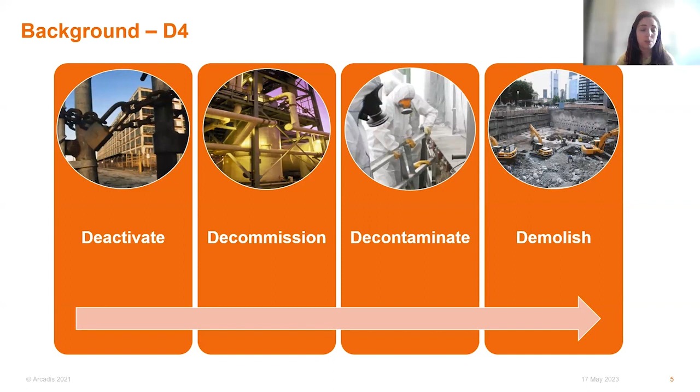And as I touched on, with the linear approach, the life of a built asset at the moment is very much extract, make, construct it, operate it until a point when it's no longer required, and then demolish it and dispose of the material at the end.

So I guess, is demolition better than remediation? Retention? It's a bit of an ethical dilemma. I think there's a couple of good examples here. Launceston Primary School is being demolished because of construction issues.

But we often find that actually, in some cases, and probably more often than not, buildings are being demolished for maybe more superficial requirements. For example, a Lidl site in Dorset has been given permission to demolish its old store because it's described as dated and can't meet the needs of the customers and their shopping environment.

So I think when you break that down, it's trying to understand what that actually means, and is it really a genuine requirement? Lidl say they're looking to install a more sustainable building, with reduced energy and water consumption, solar panels, and electric car charging points, which are all really great things and should be introduced into new buildings.

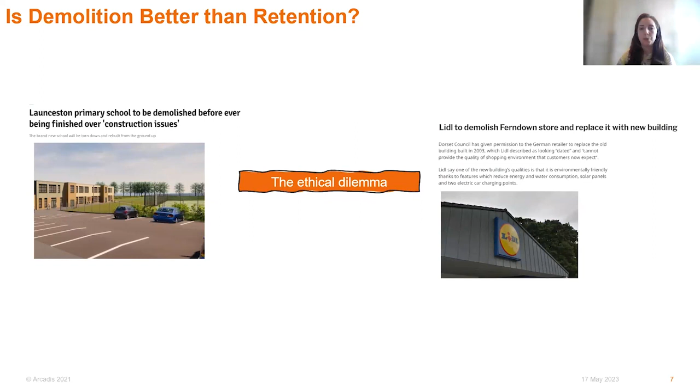A couple of articles demonstrate this is going to become a bigger issue in the future. More and more architects and local authorities are thinking about this and being urged not to knock things down. I think now's the time to change and start looking at ways we can meet our needs of the future without compromising future generations.

Another good example you may be aware of from the media is Oxford Street in London—the old M&S building—which is currently going through lots of levels of public inquiry. They want to demolish it to create a brand new store, again sustainable, efficient, and better quality.

But there it's obviously being contested. People don't want the new structure, and they don't want the demolition of the old building because it's quite a nice building. But the reason being used is essentially the sustainable impact, the impact on the environment.

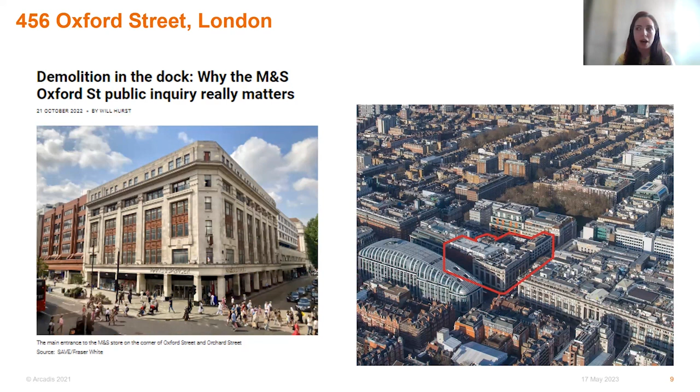London and a lot of cities have got net zero targets they are probably not going to meet, and demolition of buildings like this is only going to make that worse. So I think at the moment in the demolition sector, we very much look at the least bad option.

Currently, sustainability in the demolition sector is very much about high recycling rates and alternative fuel sources. If you look at any contractor's tender submission bid and ask them about sustainability, they'll all have the same generic answers: we have 95% plus recycling rates, all our plant is electric, we use HVO fuels. I can bet pretty much every single contractor has the same response.

And that again has a big impact on the outcome of the project. The London 2012 Olympic Park site, a 2.5 square kilometre site in East London, needed demolition of a number of buildings to make way for new development. They implemented a sustainable development strategy which set target recycling rates of 90%, which sounds great—however, that was a combined target of 90% reuse and recycling.

When the project was completed and the demolition contractors presented their actual metrics of what was recycled and what was reused, it was found that actually the rate was 90% recycling and more like 0% reuse. That's part of the problem—at the moment there's no split-out approach to looking at them separately.

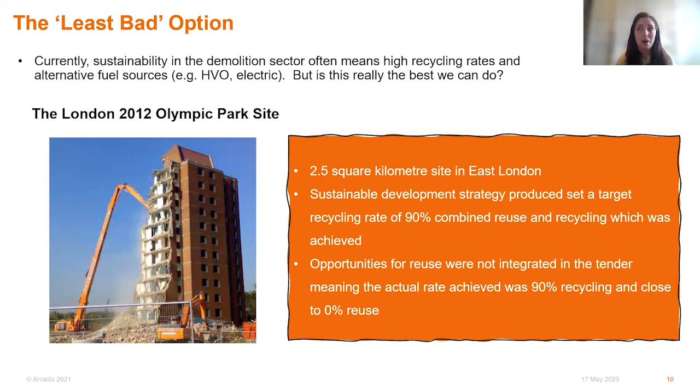So why the change? I think these are some quite stark reminders of the impact the construction and demolition industry has. When you look at these, you can understand a bit more about the perspective of where we're coming from.

The construction and demolition sectors in 2016 were responsible for 62% of the total waste generated, which is absolutely huge. And the built environment uses almost half of the world's materials extracted each year.

I think the problem we're having is a lack of good quality, accurate information. People don't understand what their buildings are constructed of, and what they can do with the materials after. There's a lack of engagement and collaboration between all the parties.

Demolition contractors and us as a team are generally brought in towards the end, and again when it's quite a reactive response needed. So there really isn't much time for coordinated planning, and to provide good evaluations and good assessments of what actually we can do with those materials.

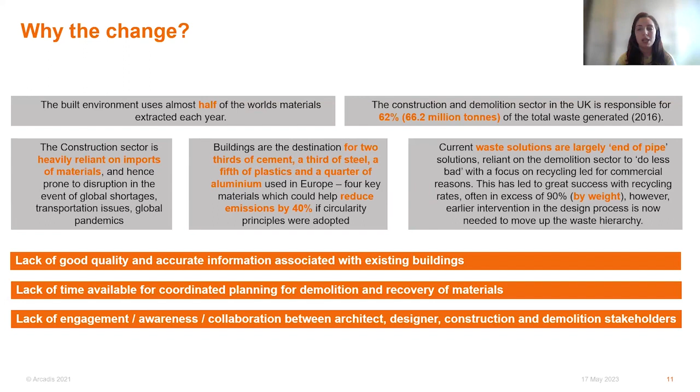Today, a lot of the focus on the built environment has been improving the efficiency of new buildings. As I mentioned, a lot of clients are looking for sustainable buildings, sustainable offices, and the decarbonisation pathways have been very much reliant on the use of alternative fuels and carbon offsetting, which personally I think

is just putting a band-aid over the problem. Obviously we should be doing what we can, but I don't think it's enough.

I think there isn't enough reliance on alternative pathways, so considering embodied carbon emissions, which is often 20 to 40% of the whole life carbon emissions of a new building.

So I think we need to be looking at the whole process. New buildings, sustainability of new buildings, is really, really important, but how are those made and what are the materials we're using to make them? Where are they coming from? Are we just constantly extracting new raw materials for that?

So the graph on the right hand side essentially comes from research from the Centre for Industrial Energy, and essentially they report that improving material use could potentially reduce emissions by nearly 80 megatons of carbon dioxide by 2032.

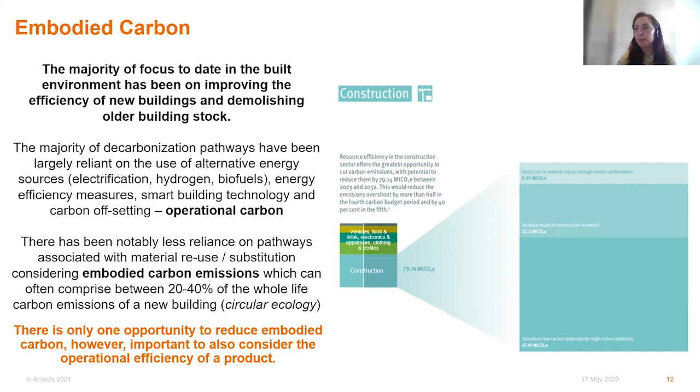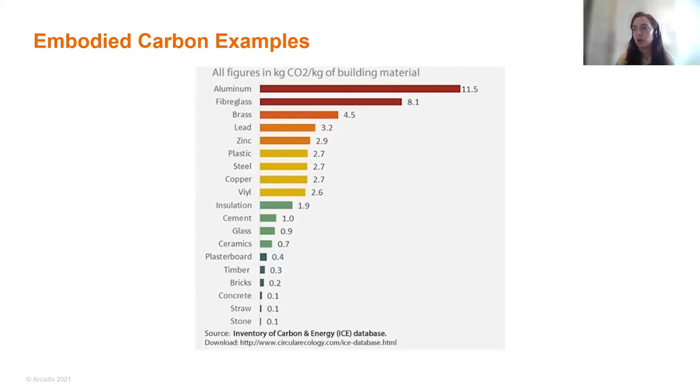Just a very quick slide showing some examples of CO2 in building materials. Essentially we look at these values and take them to do assessments when we're looking at demolition of buildings, which I'll touch on in a little while.

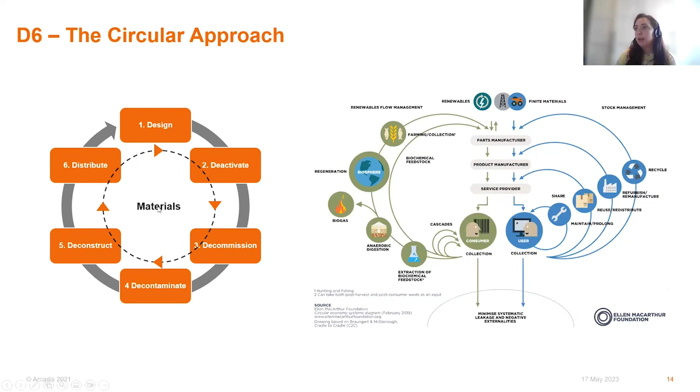So how we go about doing that - just to give a bit more information on each of those Ds and what they now mean. Obviously D1 is design, and that's where we come in at the earlier stages of the project. We're engaging with clients, designers and planners to essentially see how we can support adopting those circular

design principles in new buildings, but also at the end of life of a project, we want to engage with clients a lot earlier to help them make good assessments of what their building could be used for or where the material could go, so that they actually have a solution backed up by science, rather than just saying, oh, well, we'll just send it off for recycling and that's great.

So deactivation of facilities. Previously that was sort of removal of plant and equipment, and it still is, but rather than just sending it off for recycling as it often would do, it's looking at alternative ways those materials could be repurposed. So potentially could they go off for auction, or could they be used on another site elsewhere? Charities we find often take equipment depending on what the site is.

And then that's deactivation, decommissioning, decontamination. So obviously continued removing of all the contaminants.

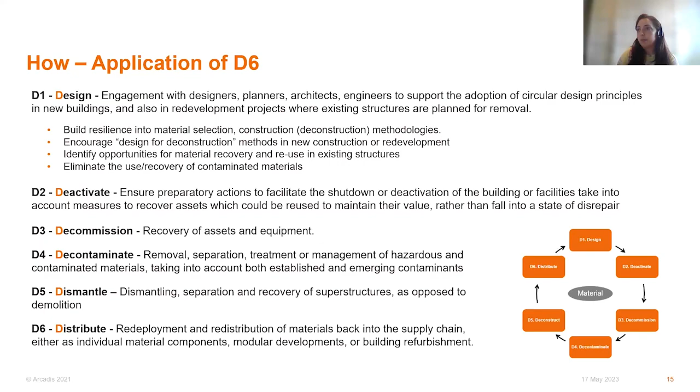So how are we approaching this? I guess the main one, starting with the design stage, is waste and carbon audits. I think the COVID pandemic has very clearly exposed issues of the linear economy, with shortage of materials, brick, steel. We know how hard it was to source certain things during the pandemic, which is in some cases still the case, and that leads to increasing prices.

So I think we need to start viewing buildings as material banks instead. There's a number of ways you can do this. You can look at it through design of redundant asset decommissioning, so that's what we would call asset retirement planning. Looking at a structure and understanding what materials you have there and what is the embodied carbon of those buildings, and if you plan in advance how you can then design the most sustainable approach to demolishing that building, backed up by actual science.

And then also looking at the sort of new normal of modern buildings as well - planning for retirement. We know that longevity of buildings is just not really considered anymore. Needs change over time, need for different areas, different buildings. And so if that's the case, we should be looking at how structures are built in such a way to allow them to be taken down, to be able to repurpose those materials in future, if that's what the new normal is.

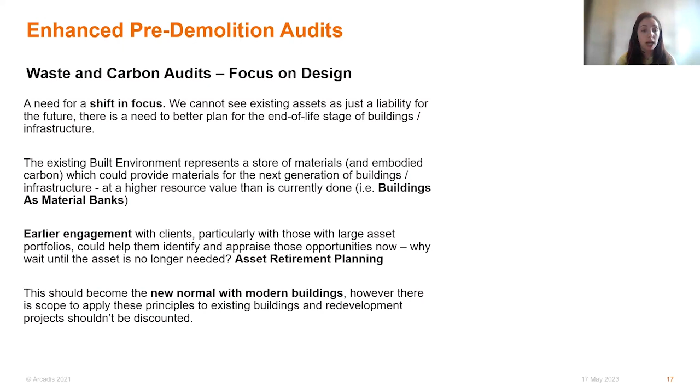And we do this through starting off with a number of surveys, so measured building surveys, allowing us to accurately quantify materials that are likely to be generated, estimate embodied carbon in those materials, identification of potential reuse options - so again, auctions, sister sites that the company might have - and then quantification of opportunities available in the overall project. So if you have a client who is going to demolish their site and then redevelop it themselves, is there a way that those materials from that demolition could then be integrated within that new redevelopment as well?

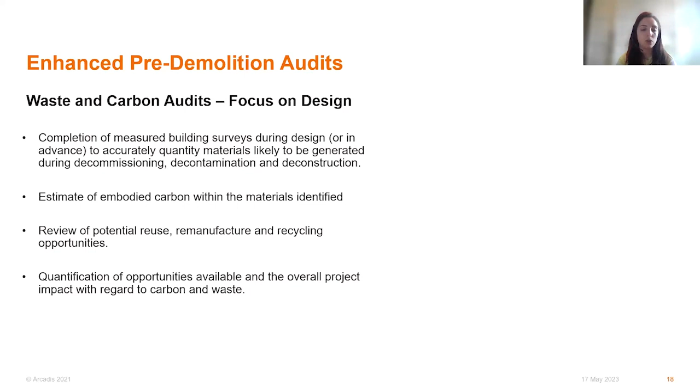So I think, as always, digital innovation technology is always the way forward. We are working on a number of building surveys at the moment, internal building surveys to look at the internals of a structure, but also getting good quality drone models to allow us to actually accurately measure structures. Previously it would be done by demolition contractors or a surveyor potentially going out and just doing the visual assessment, and I think that's part of the problem - people don't have enough good quality information about their building and what it actually holds and stores. Whereas being able to carry out specific surveys will allow us to give much more confidence in the data and the amount of materials there.

And below is an example of a carbon assessment, showing three different routes with the outcome of materials. So you can see, obviously, with the disposal route, you essentially lose all of your embodied carbon.

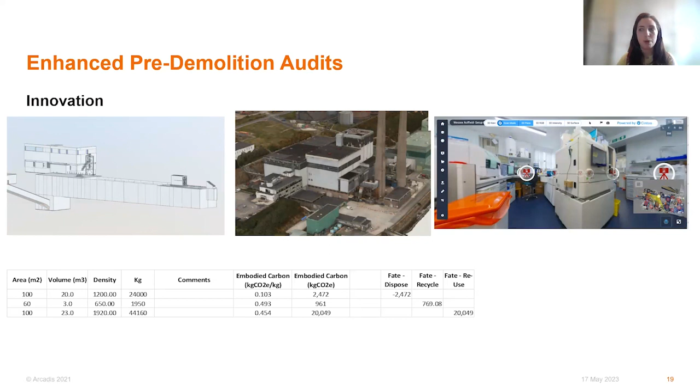If you recycle it, you retain a portion of it, but you still lose some of it. But with reuse, you will obviously retain the entire amount of your embodied carbon. That's what the assessments aim to do, so you can make a decision on what you want to do with that structure. There are also other factors to take into consideration, because retaining a material is great, but it depends on the impact of the wider project. So that leads us on to the decision.

So, deconstruction or demolition. I think deconstruction, on the face of it, seems like the most sustainable option, but actually there are cases where it's not. For example, the extent of the site, the size, the program, the number of resources might need to be considered. Are there any remediation works needed at the end? Because deconstruction is slower, you'll have a prolonged time on site, so there will be additional resources, additional welfare time. You need to consider the impact of that.

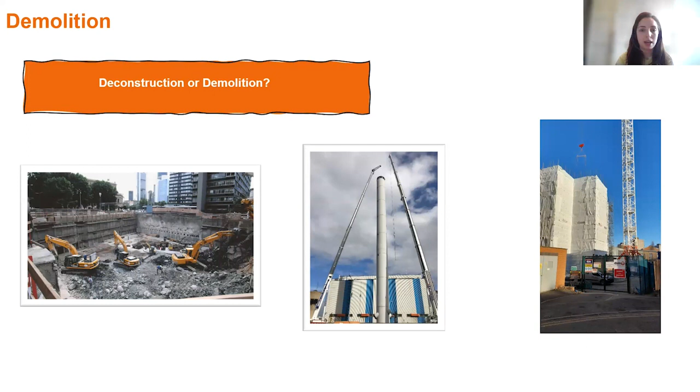Basically, what we're saying is that it's not one size fits all, and it's not a yes, every single building should just be deconstructed. There needs to be some kind of thought-out approach and process to allow people to make accurate and good quality decisions.

I think a good example is the use of bricks. So we had a site recently where the redeveloper wanted to reuse the bricks, which again, great, love to do. However, there would have been the initial additional energy consumption due to more time and labor on site. So that's one thing you have to take into consideration.

However, on this site, the potential recovery rate of the bricks was only about 20%, because of the way the building was built. There was a very good chance that as you took the building down, you might lose the other 80% because they'd get damaged. You then couldn't use them in the new design, in the new scheme, because they weren't structurally sound.

On top of that, you've also got the impact of transporting the bricks off site. If you take all of those off site, that's a number of vehicle movements. On this site, we actually ended up having quite a few excavations to backfill, so we would have had to import a lot of material back into site to fill those excavations. So in the end, we made the decision that the most sustainable option was purely to crush the bricks and use it as backfill.

But again, it's a process of reviewing that, and there was quite a lot of research that went into the process of recovering bricks and how that would look, so we could make that decision backed up by some evidence.

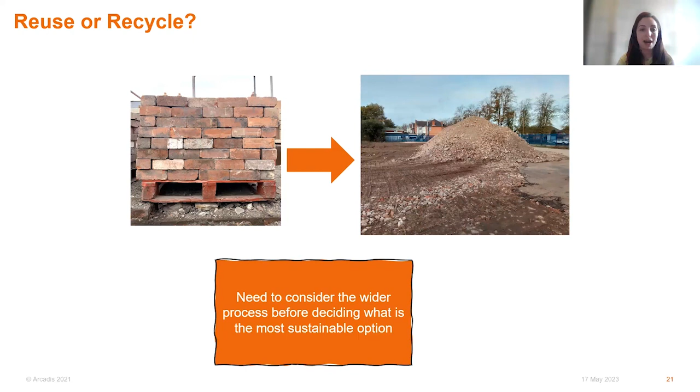So just to talk to you about a case study of another project I worked on about 2 years ago now, which was a precious metals refinery in London. It was built in 1924, and essentially closed down in 2018, then in 2021 it was sold to a new development company. So it was sold beforehand, and then development was going to commence in 2021. So we needed to decontaminate the building, decommission, demolish and remediate.

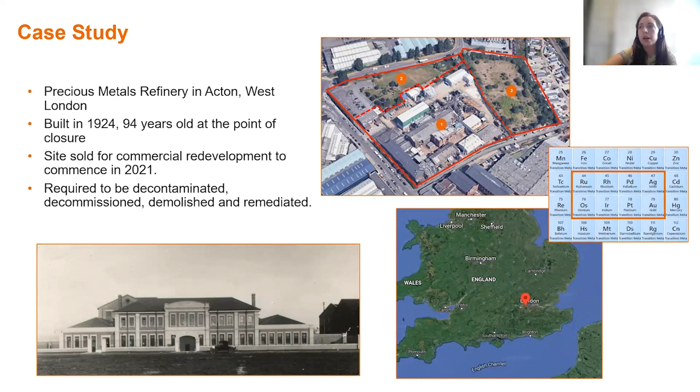Because it was a precious metal refinery, those 8 metals shown on the screen there provided quite a lot of risk to the site from a health point of view. So the primary driver on this project ultimately was health and safety.

And the client was very, very concerned around the PGM dust. PGM dust could cause people to become sensitized, it can lead to cancer, it can have lots of other harmful impacts on people. So they were very worried about this building being taken down and potentially dust being released, causing health impacts for people in the local community and the construction workers on site.

One of the ways to deal with it is to potentially take the material and dispose of it at landfill. What we did instead is work with a company based in the UK who recover metals through thermal treatment. So this is where it comes into the design stage.

We undertook a lot of investigation on the site. We introduced something called an XRF, which essentially you can use to screen materials, and it gives you a value of how much PGM is in that material. We did that on soil, concrete, building fabric, and all the historical equipment as well.

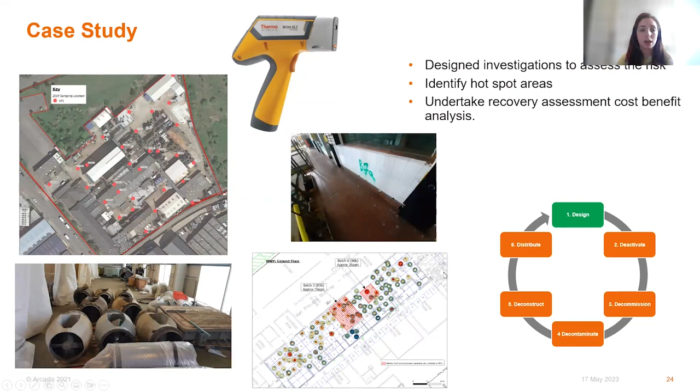That allowed us to undertake a bit of a recovery assessment. We had quite a lot of concentrations of metals in some areas, so we decided to send that off for recovery.

The process followed with decontamination of the plant and equipment. We washed down the former tank farms and also the residues on buildings. We found there was quite a lot of dust sitting on the tiles, and we were able to collect those residues through the effluent, which filtered out the PGMs. We would collect PGMs and they could be sent off for recovery as well. We were also then able to do an early hotspot removal.

We went round and essentially pulled up areas of tiles, grout, concrete and soil where we thought there were high levels of concentrations of platinum metals, and we sent that off for recovery.

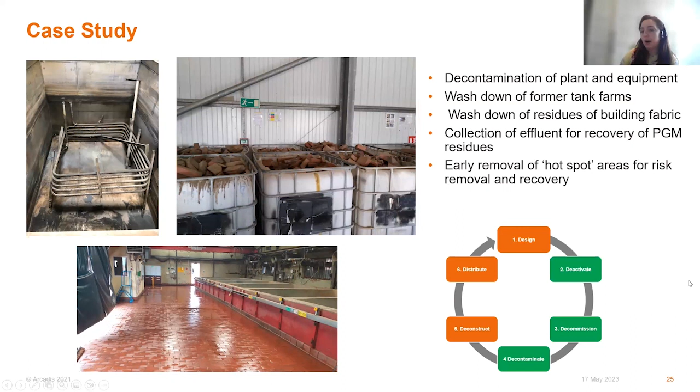That meant a significant amount of material wasn't going to landfill or going for recycling.

On this project specifically, we didn't deconstruct the building for a number of reasons. The scale of the site was enormous, and that would have led to a hugely prolonged program. There were a lot of people on site, and a lot of welfare buildings just to meet the needs of the project, which would have had a huge impact from an energy usage point of view.

We also had significant quantities of material. All those materials, if we'd deconstructed, we would have had to import through London via significant truckloads. On this one, again, we had a lot of excavations on site.

So we had to undertake a massive remediation program. If we'd deconstructed the building and the material had been taken off site to go to a reclamation yard or for use elsewhere, we would have had to import huge amounts of material to bring back into the site to backfill excavations with.

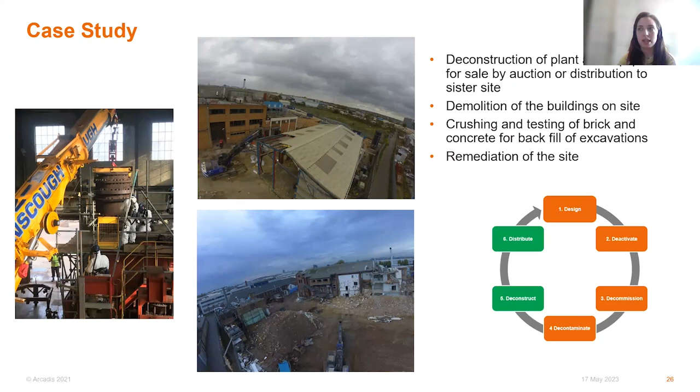Again, I think where possible you should recover certain bits, whether it's plant or equipment. It depends on where it's going and what it's being used for, so it has to have that bit of an options appraisal to see what is the right thing to do.

But the outcome of this project was that we essentially avoided huge amounts of waste going off site. We were able to reuse a lot, and we were also able to auction off and donate a lot of the former assets from the site, including industrial furnace that got taken off elsewhere.

Recycling - we ended up recycling quite a lot of other material. So where equipment was washed down and decontaminated appropriately, it didn't need to be recovered because there wasn't anything on it, and that could then be recycled rather than sent off for landfill. The recovery aspect of all the platinum metals equated to around 400 kilos of PGM.

Metal mining has a huge impact on the environment, so being able to reuse those metals and put them back into the economy is fantastic - a really good all-round outcome for how we tackled sustainability on that project.

I think the outcome, what I've said hopefully throughout the presentation, is that not one size fits all. So it's having a good options appraisal backed by science that helps our clients make good decisions.

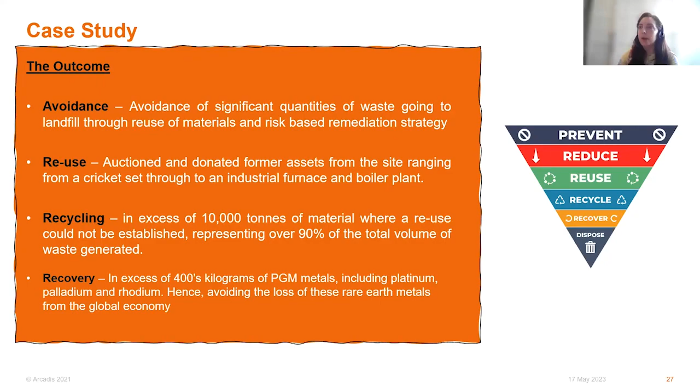Just lastly, a couple of bits on future trends - the way we see things going at the moment. I think there's going to be a lot more influence on new waste markets and waste streams, with opportunities for companies to distribute materials that have come off their facilities. Things like reclamation yards, I think, will start to become more of a thing in the construction industry.

Increased digitalization - we talked about the building surveys and how those can help make those decisions. A lot of it is about having good quality data, which a lot of our clients don't have at the moment, so being able to use digital tools to give them that allows us to make better decisions.

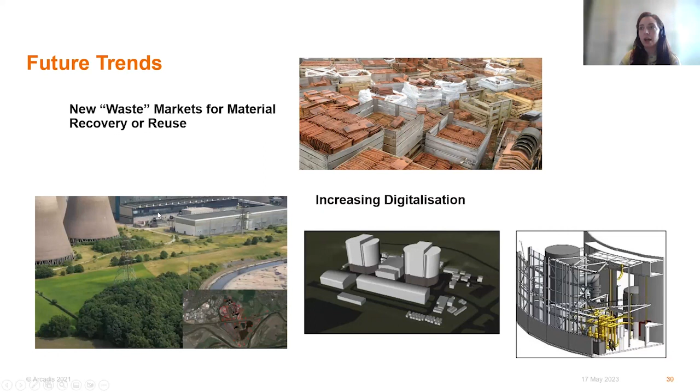And then lastly, electrification of plant and alternative fuels. We're starting to see a lot more of this now. I think they tend to use it where they can, but it depends on availability of sources in the area, depends on where the project is and various other aspects. But we're starting to see a lot more focus on use of different fuels and electric plant and equipment nowadays.

And automation of plant as well, because with deconstruction of a building, it's not always the safest way to go about it, depending on how it's done. It often includes things like encapsulation of a building, where you've got people working on top of a structure, which isn't necessarily the safest way to go about it. So if there's a way we can create plant that takes the element of people working away from it, it obviously makes it a lot safer.

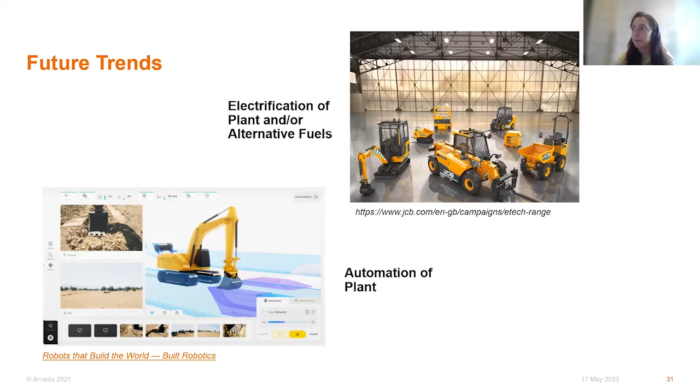So yeah, that's it. Thank you for listening.